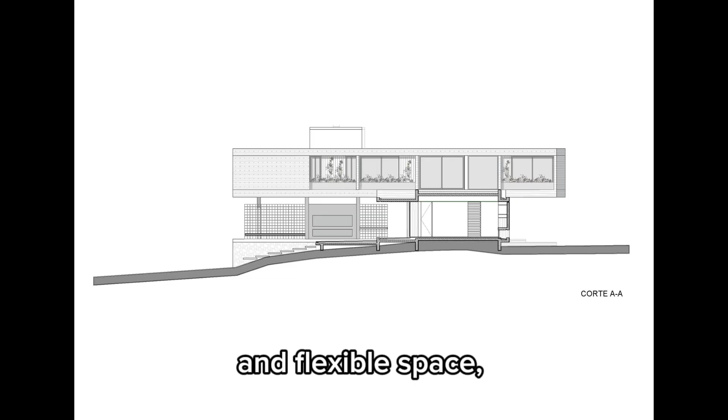The lower floor houses the public spaces, living room and kitchen, and appears as an indeterminate and flexible space, perched on the highest level of the land, taking advantage of its dimension and releasing the largest surface area towards the best views and best orientation.

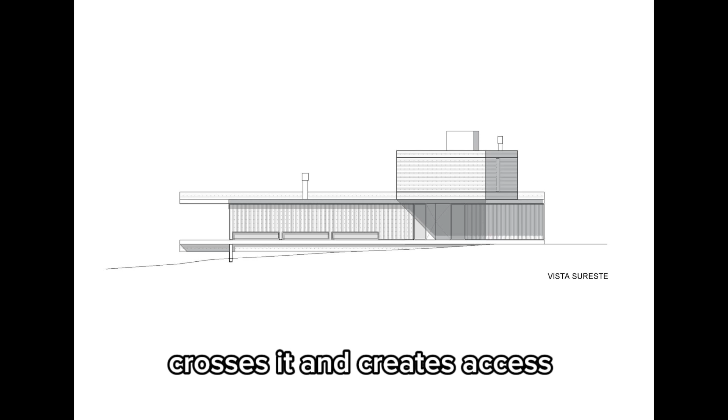The upper volume that contains the private sector of the bedrooms crosses it and creates an access cantilever, supported by cylindrical columns to form the semi-covered gallery, a shadow space towards the garden.

In the intersection space of the two volumes, the kitchen is located, which belongs to the social space because it is in visual continuity with it, and simultaneously integrates and serves the semi-covered grill area.

The aspect that highlights architecture as an experience of place is the dematerialization of the limits between interior and exterior space, increasing and enhancing its visual connection with the landscape.

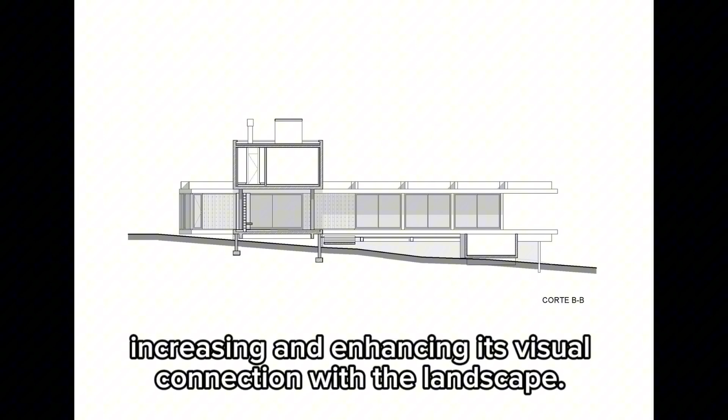Geometric operations were carried out, focusing on the fluidity of space as a mechanism for the generation of non-hierarchical spaces, making domestic tasks visible, allowing shared use of spaces for domestic and daily work.

The flexibility mechanism is completed with the ability to arrange equipment and furniture in different ways within the same space, defining a personalized and integral aesthetic as an indissoluble unit of architecture and design.

The architectural language is determined by the construction system. The structural system is reduced to the minimum: a double line of pillars running longitudinally throughout the lower body.

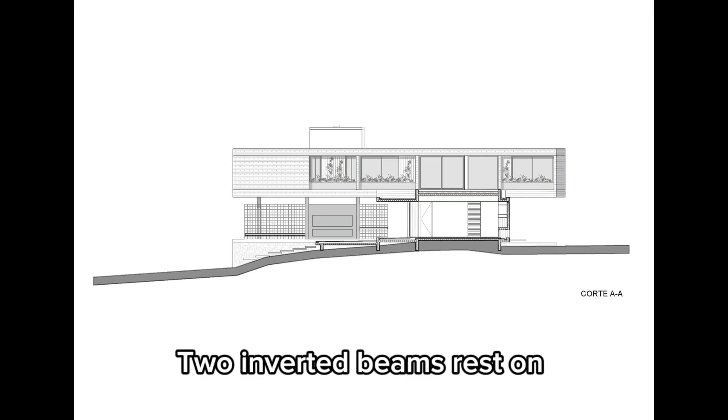Two inverted beams rest on these, and a continuous slab suspended below them defines and unifies the entire interior and exterior space of the ground floor.

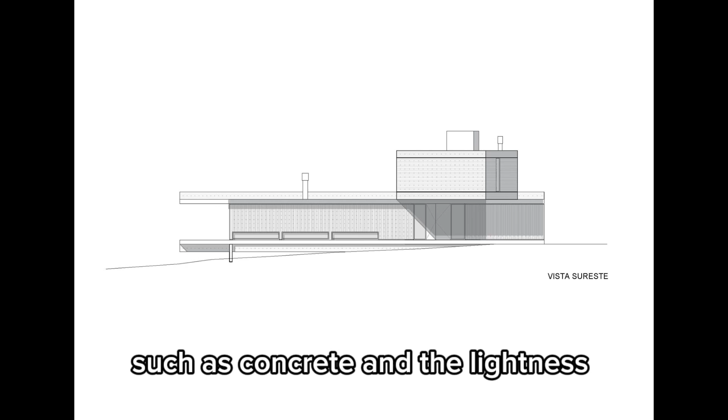The dialogue between the heaviness of materials, such as concrete, and the lightness achieved through the design of the voids takes on a predominant relevance in the final result of the composition.